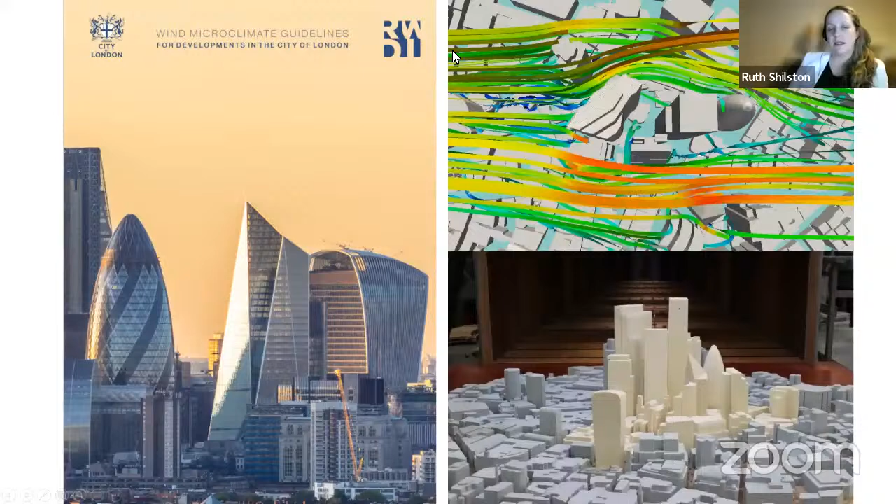And the two guidelines that are up on the screen here today are the two guidelines that govern how we undertake a daylight, sunlight and overshadowing or a wind assessment. So the City of London initially became interested in the quality of the public realm just from a wind point of view. So wind microclimate assessments have been undertaken on projects probably for the last 10 to 15 years.

And the City of London, which is in particular the financial district, the sort of modern downtown area of London, has had an explosion of tall towers in that time. And there were a number of towers which brought with them a reputation for being windy, for being uncomfortable. And the City of London came to realize that although they had a wind microclimate assessment undertaken on each of these schemes, that each scheme had used a different methodology, be that computational fluid dynamics modeling or physical wind tunnel testing.

They were using different versions of the assessment criteria, which in the UK is the Lawson comfort criteria, but there are many different versions out there. And simple things such as results were presented using different color scales. So that made it really challenging for the city officers to really understand those results. So they worked with RWDI leading up to 2019. We put in place with them the wind microclimate guidelines specifically for the City of London.

And these guidelines set out a minimum methodology for undertaking wind microclimate assessment. And it sets standards such as ensuring everyone's using the same climate data, same color scale, same assessment criteria, and sets up minimum standards for computational fluid dynamics modeling and physical testing. And for the UK, this is the first location that's had a set of guidelines that said how you should undertake a wind microclimate assessment. Everyone knows that one should be undertaken, but there were no guidelines for how one should be undertaken.

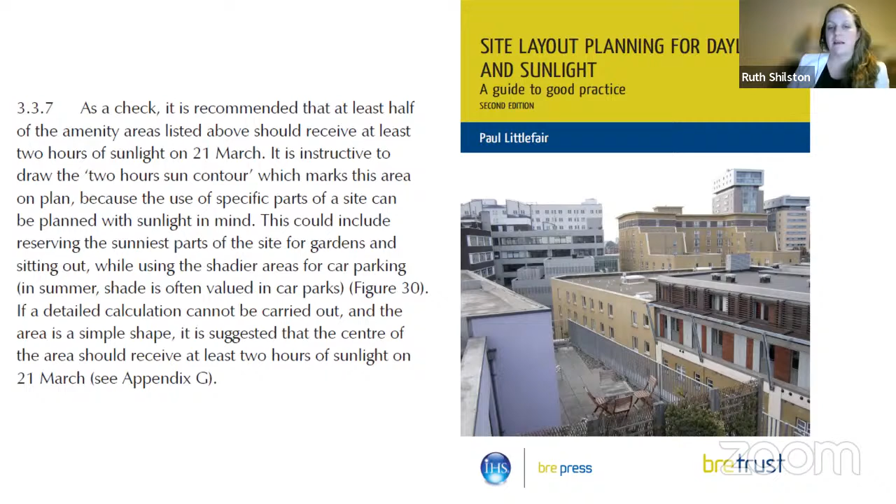So if we move on to the next slide, one of the fundamental components of the UK planning process is that each of these assessments is undertaken independently. So RWDI might be the wind consultant and the daylight sunlight overshadowing consultant, but historically the two assessments are undertaken completely separately with completely separate reports.

And it's actually very, very challenging for the planning officer to look at the wind results and the daylight sunlight overshadowing results and to combine the two together to actually have a consideration of whether a space truly is comfortable and whether a new development, a new tower, will adversely impact an existing space.

So for this reason, the City of London came back to RWDI and said, well, we'd like to have developed new guidelines that build on the wind guidelines that have been really successful, to create new guidelines that better measure how comfortable an external space actually is. And that's what brought us onto this topic of thermal comfort. So RWDI were the lead authors of these guidelines.

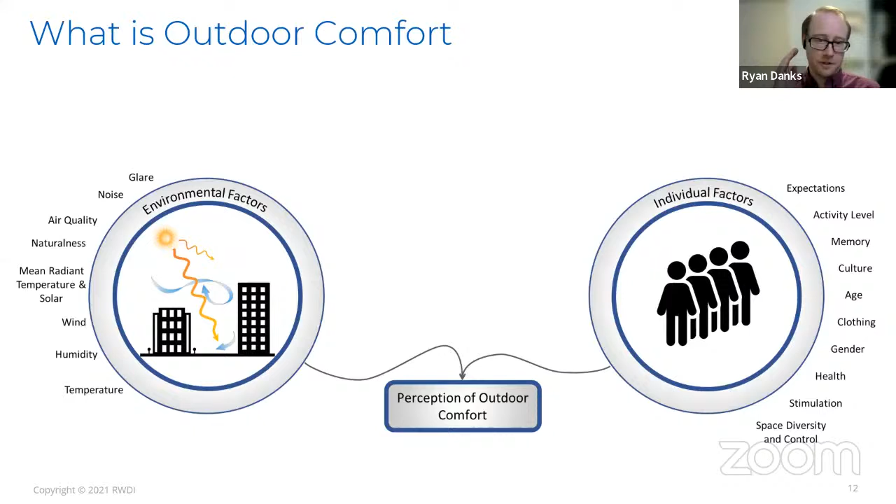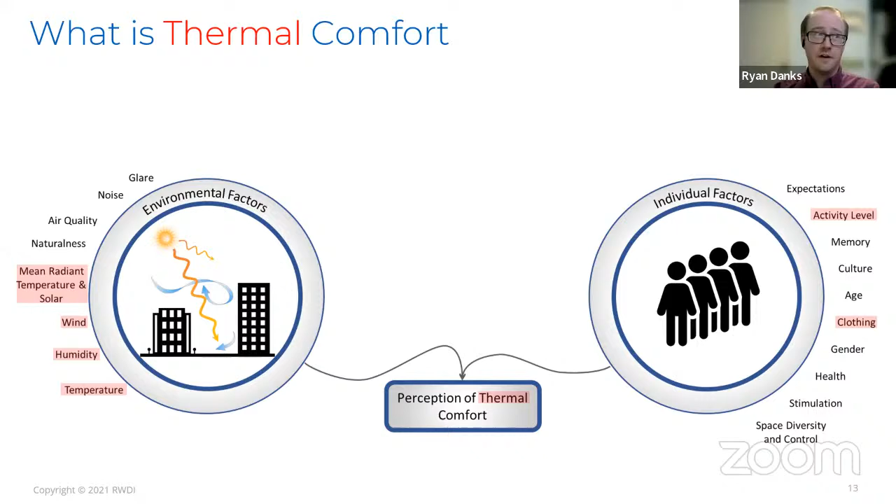And one of the big wins of these thermal comfort guidelines is taking a step toward that more holistic assessment of a building's impact. We're now looking at the combined effects of at least sun and wind. And thermal comfort was a good place to start because it's been studied for decades. We have no shortage of different ways to score an environment from a human thermal perspective. You know, at its simplest, we have metrics like humidex and wind chill.

Indoors, we have the PMV scale, which has the advantage of that very simple to understand scale where 0 is comfortable, and then as you move positive or negative, things get hotter or colder. The problem is we can't extend that outside. People have different expectations. The range of climate parameters are different. PMV just doesn't work outside. So more commonly, we're using equivalent temperature metrics like UTCI, SET, or PET.

And these can come with their own challenges too. UTCI includes some assumptions that can make it difficult to work with. And all three of those metrics, the equivalent temperature is actually an equivalent indoor temperature. And in our experience in consulting with these metrics, that can require a lot of coaching on our part to make our clients understand that.

A lot of people think it works similar to humidex or wind chill, where it's basically an outside temperature getting hotter, and that they would be able to measure this, UTCI of 35 degrees outside. And it can challenge their ability to understand what that really means. But as we'll see a little bit later with these guidelines for London, we were able to come to a workaround to try and make these results a little easier to understand for the general public.

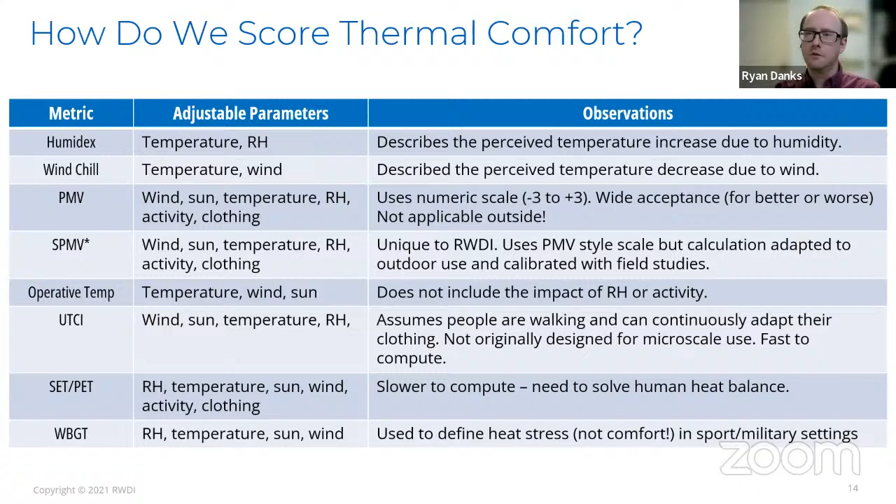And the question may be, why do we even bother doing this? Ruth mentioned a few reasons from sort of a branding big picture perspective, but there are financial considerations too. Cities spend a lot of money to maintain their public realm and their parks and trail systems. And so even if we add just a few weeks in spring and fall, even if we're just stretching the envelope of time that things are comfortable, that's a big win.

No one expects these guidelines to make things perfectly comfortable year round. But if we can add a few weeks where our parks are more usable, or businesses can take advantage of outdoor dining, that's a big win.

There is an environmental justice aspect to this as well. Not everyone can afford to drive in a climate controlled vehicle around the city or have their own little private garden to enjoy. People have to walk, people have to take the bus and wait for it. People need to use our public parks to get their daily dose of green space, which, as we all know, is so important. So by making sure our public realm is comfortable, that can actually mean a reasonably good quality of life improvement for many people in our cities.

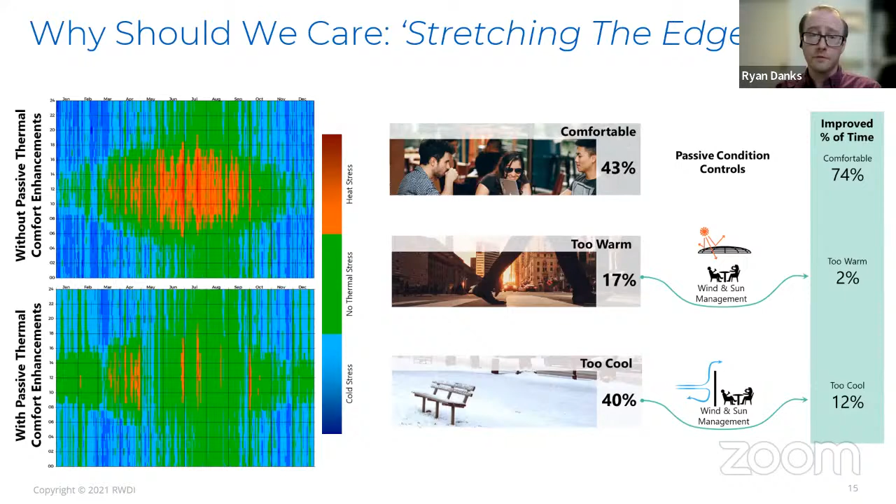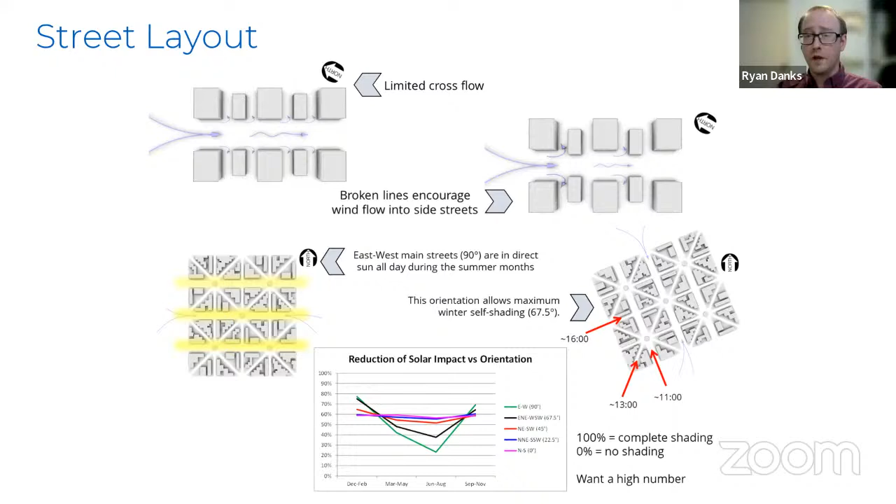So if we work our way up this pyramid, the biggest lever we have is the actual orientation and layout of our buildings and our streets. Now, in the context of a planning permission in London for a single building, this is not something we normally have much control over. Street layout is defined, the building footprint is fairly constrained. But if you're working on a larger master plan or a campus, it is important to know that through some thoughtful arrangement of your streets and your buildings, you can have a high degree of control over a large area, how much sun and wind they're exposed to, and therefore their thermal comfort. But in the context of the London guidelines, really manipulating the massing of the building is our most powerful tool in our toolkit.

The new kind of paradigm we need to be thinking about, though, is balancing these things together. Because we've always treated sun and wind as separate things, it's led to a lot of binary thinking where we always want to reduce winds and we always want to increase sun. And that isn't always going to be the case. Depending on where you are and what time of year you're talking about, a little bit of wind or a little bit of shade might actually be good. So it's this idea of balance and thinking in a more holistic, big picture way that we're really hoping to drive forward with these guidelines.

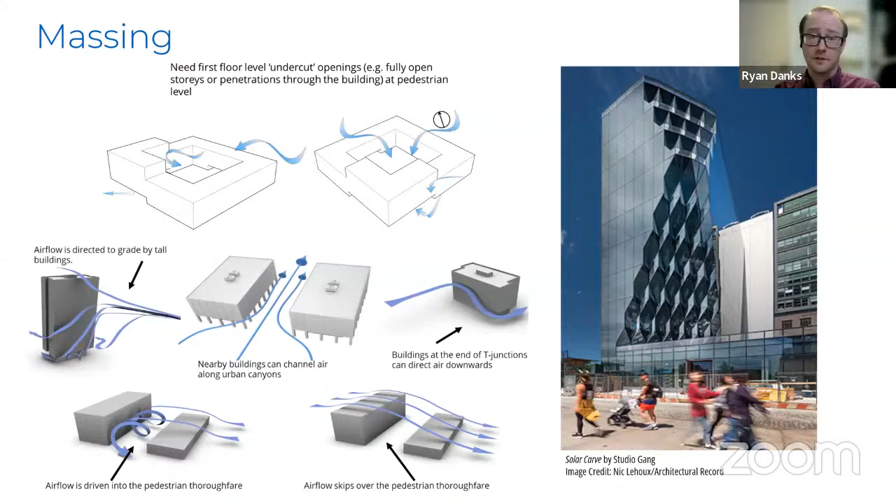If we move up another level, now we're looking at smaller scale interventions that you would add if massing was relatively fixed, or if you've done all you could from a massing standpoint.

Very similar to the previous discussion, trees, canopies, windscreens, we know how these things interact with wind and sun, but it's the idea of balance we need to remember too. If you're putting up a large windscreen, you don't necessarily want to make it opaque so that you can get winter sunlight to keep things warm.

At this scale, we're also now starting to get into measures that could potentially be operable. And that provides some very useful potential benefits. Windscreens can be rolled out as needed, opening up the space the rest of the time. You can use patio umbrellas to allow people a sense of control over their environment, which, there's been some research that has shown that this has a positive psychological effect on people, makes them more tolerant of their environment when they have a sense of control.

Even thoughtfully landscaping to provide a diversity of thermal comfort conditions can be really positive. It allows someone, again, that choice, that sense of control, to choose what sort of an environment they're sitting in. I can choose to sit someplace sunny or someplace windy.

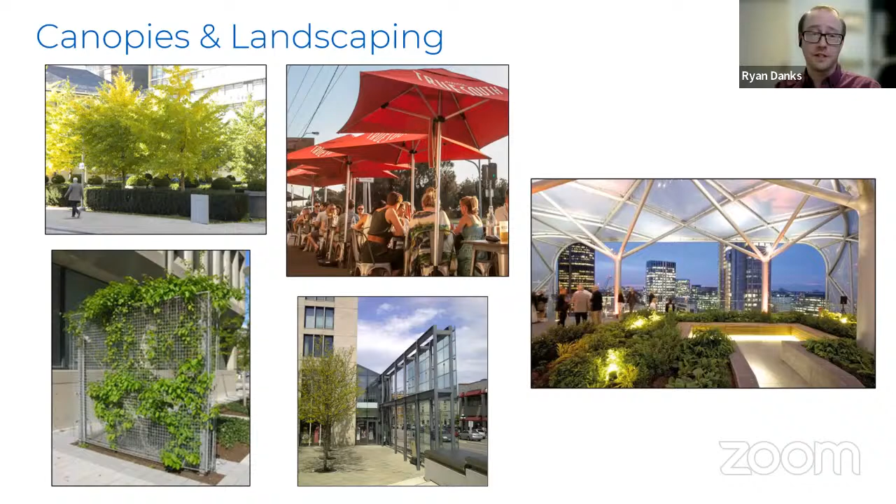And then at the top of the pyramid, we've got what we're calling active measures. These are thermal comfort enhancement strategies that require an outside source of energy. So these are misting systems, spill air, patio heaters. And these cannot be your primary approach to mitigating thermal comfort. In fact, in the context of the guidelines, these are explicitly disallowed. You have to do as much as you can passively first, and then the building owner can elect to use these measures as sort of a backup, or for cases where conditions are particularly extreme.

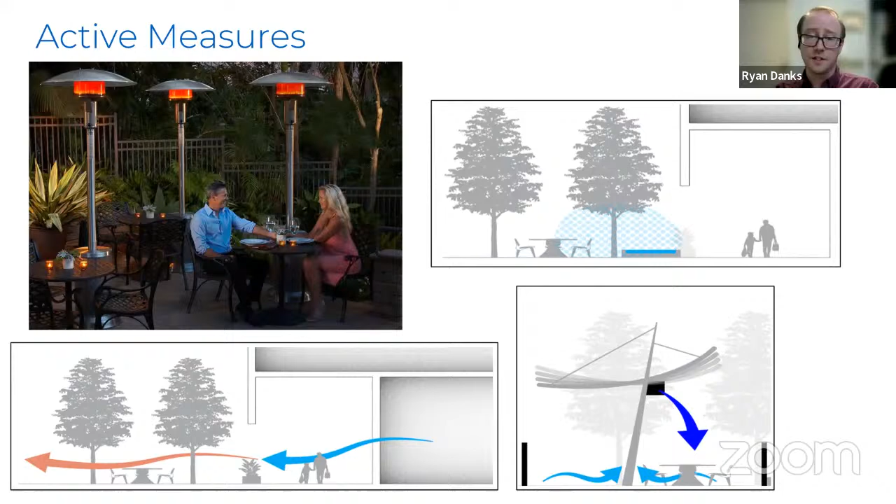But again, it's important, these can't just be plunked down anywhere. These also need thoughtful design. There's no point putting a misting system or a patio heater in an area that's going to be very windy. You're just going to completely dilute that impact, and it doesn't serve any purpose. So active measures can be useful. They cannot be your primary source of thermal comfort mitigation. And even if you are going to use them, they still need thoughtful design.

So having gone through all that, I'm now going to dive into a high level overview of the methodology itself. If you want all the gory details, there's the IBPSA paper that we wrote for last year's conference. But for the purposes of this webinar, I'm going to keep things fairly high level.

And kind of the most important thing to understand about these guidelines is that they are, at their core, a planning tool. We're not claiming that this is the most sophisticated or particularly novel approach to looking at thermal comfort. But what we needed was a tool that could create consistent and actionable measures for the planning department. So, no, we're not doing detailed representation of surface temperatures. We're not looking at transpiration from trees or plants. We're focusing on what the building mass can do to the public realm.

And that allows us to eliminate a whole lot of assumptions that would need to be made in order to conduct these studies, things that may not even be well known at the time of planning. And by removing those assumptions, we make things simpler for the people who are conducting these studies and the owners who have to pay for them, which means we don't disrupt the current workflow too badly, which was important.

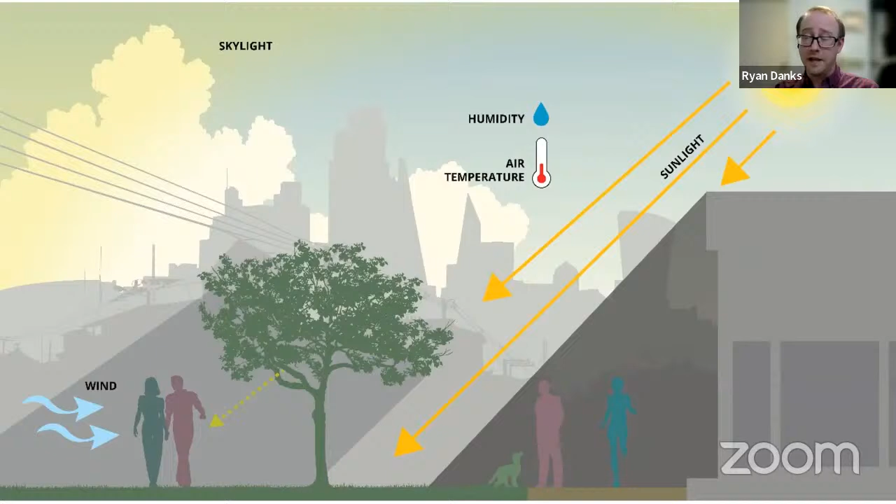But also, by removing the assumptions, we remove the opportunity for game playing. As soon as someone introduces guidelines or rules, there's going to be people out there who try to find loopholes. And the fewer avenues for that game playing, the better, because we want to make sure we're getting consistent results. Planners want to make sure they're always comparing different schemes using the same yardstick.

So that kind of boils down our thermal comfort equation to this. We combine MET data with simulations of wind and sun to get thermal comfort. On the climate data side, we needed to deviate a little bit from how things are commonly done in the UK, in that we actually have to use a time history of climate data rather than the more traditional Weibull statistics for wind. We need to know multiple parameters simultaneously, so we have to use a time history.

We also aren't necessarily able to use the typical year files. In the UK, they're called test reference years. And the reason for that is we want to look at things seasonally.

And there's often just not enough data once you've accounted for when certain spaces are likely to be used by season to have a good statistical understanding of when spaces will be comfortable. And that's never mind the fact that the weighting schemes for those typical year files don't really prioritize wind. So the wind data, especially as you get down to seasonal scales, can be kind of suspect.

And so what we're looking at here is a comparison of the data that we helped the city generate compared to a test reference year for London. And I should say that the data set for the city that we used was the most recent 5 years available from the EU's Copernicus atmospheric modeling system. So a data set taken right over the city from 2015 to 2019. And it did include things like the urban heat island aspects of the city, but not necessarily the smaller scale interactions of the city with the climate.

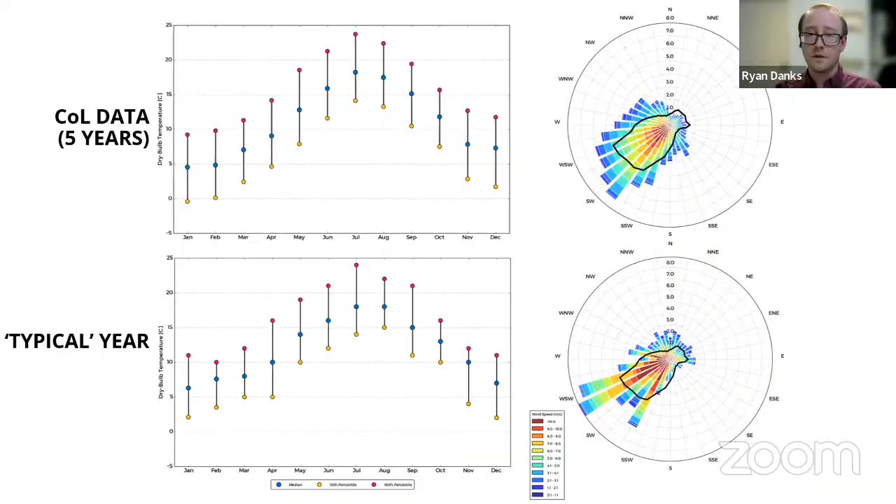As I mentioned, the advantage of this file is it's also able to take advantage of London's heat island effect, at least in a gross sense. And by taking the most recent 5 years, we've also captured several extreme cold and extreme heat conditions that happened in the city, which allows us to, to an extent, acknowledge climate change without needing to use prognostic techniques, which again introduce assumptions that we were looking to avoid.

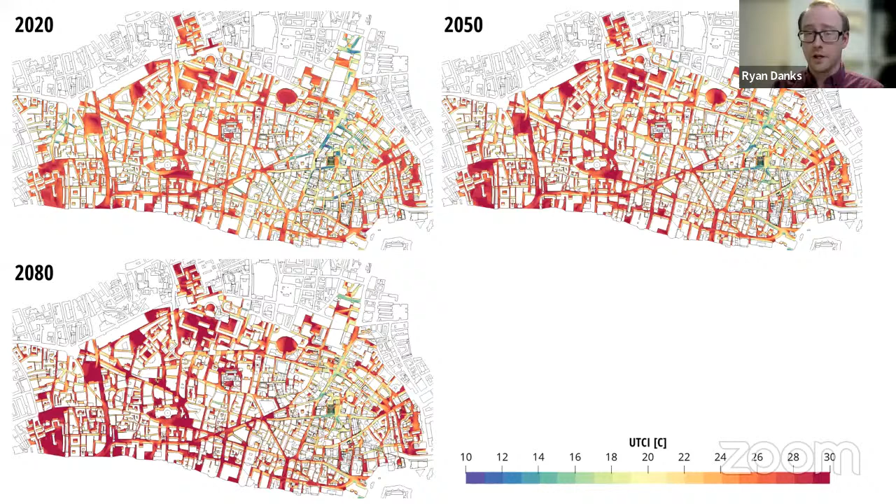So once we have our climate data, now we need to conduct our simulations. For wind, because the wind guidelines had been published just the year prior, we really didn't need to write very much in the guidelines about how the wind aspect of these studies should be conducted. This provided us with basically a fit for purpose approach for doing wind assessments. So if your simulations were compliant with the wind guidelines, they will be compliant for the thermal comfort guidelines. So this is a nice, efficient way to reuse that data in the planning process.

About the only variation was an explicit preference for CFD and computational approaches in the thermal comfort guidelines. And that was really just so we could get a better spatial resolution at the ground. That's not something you can really do with wind tunnel test points, and it is more important for thermal comfort since that can vary spatially much more quickly.

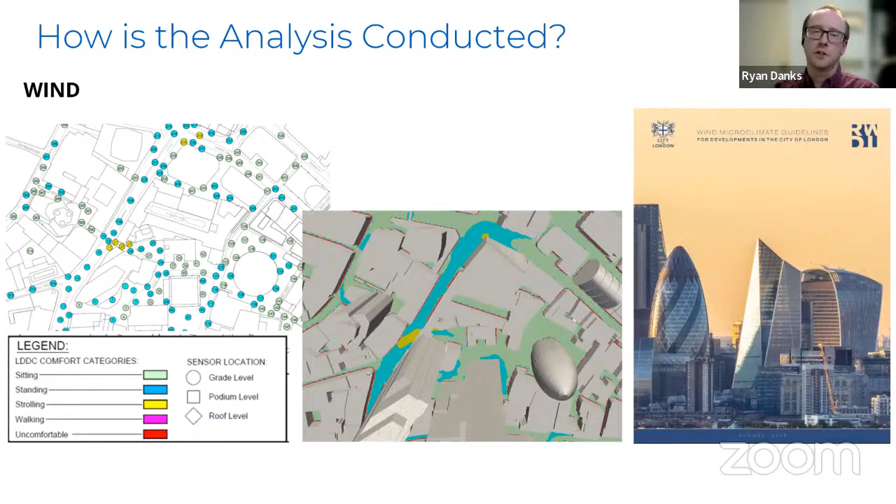On the solar side, however, we had to depart quite a bit from existing practice. Ruth alluded earlier that the current approach isn't necessarily very robust. And so we really needed to work a lot in bringing up the standard for conducting a solar study. So hour by hour simulations, proper view factors onto people for looking at the direct component, and using a more reasonable representation of the diffuse radiation coming from the sky.

In standard daylight requirements in the UK, you use the distribution here in the upper right. That's the CIE standard overcast sky. Very handy to use because you can compute daylight factors by hand if you need to with this.

But this distribution of energy is entirely fictitious. There's probably never been a sky with this distribution of radiation. And given London's cloudy climate, understanding that proper distribution of diffuse energy is actually pretty important. So the big requirement we had in the thermal comfort guidelines to try and remedy this was a requirement to use a more modern energy distribution that will vary hour by hour as you go through the MET record and distributes that energy in a more realistic sort of way.

The model we're showing here is the model from Perez. So we've got a central zone that's brighter because that's where the sun is, and then the brightening at the horizon because of reflections. And so this really was the biggest departure from existing practice, but hopefully it's one that we'll start seeing employed elsewhere because it really does a much better job at understanding those direct and diffuse solar heat components of the mean radiant temperature.

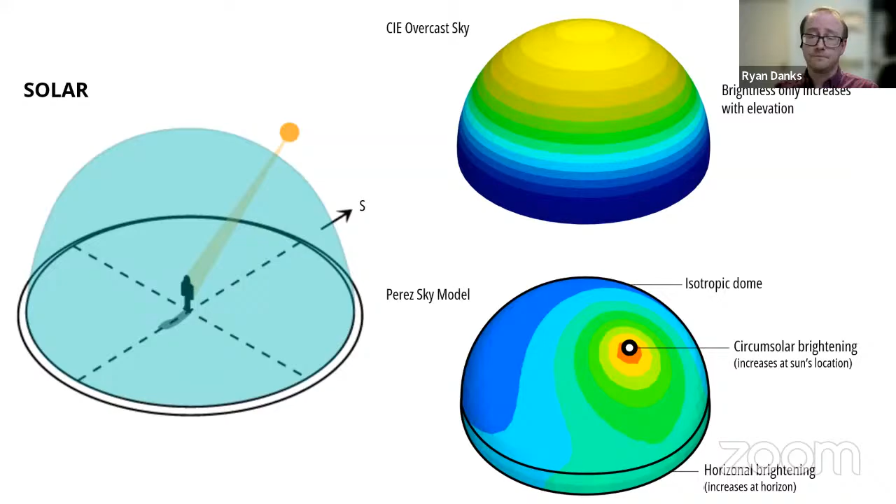And then lastly, I'll touch on our choice of metric. So there's no shortage of them, as I said. We settled on using UTCI. And there were a few reasons for that. The first was that this is a fairly recently developed metric. So there's lots and lots of available literature on its development. And a lot of those papers are freely available. So it is maybe a bit more transparent than some of the other metrics we could have chosen.

It's also available as sort of a high order polynomial function, which is computationally more efficient than some of the other metrics where you have to actually compute that human thermal heat balance hour by hour. And when we're talking about domains that are hundreds and hundreds of meters in radius, that speed up becomes very important.

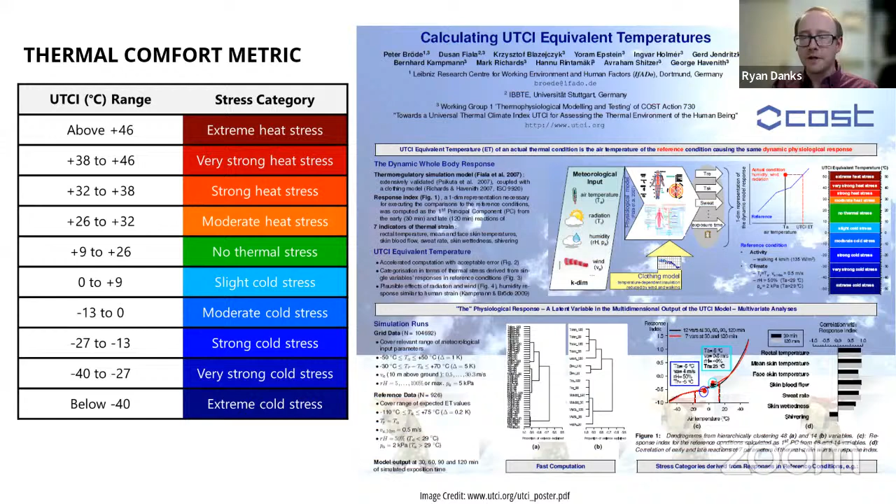It's also a nice metric because it takes people out of the equation. It makes assumptions about what they're doing and what they're wearing. And so again, that removes an avenue for game playing. We're only looking at the building now. You can't nudge up somebody's clothing level to make results look better.

Now, UTCI is not without its faults or challenges, particularly those assumptions about people. In this work, they're pretty reasonable, but you need to be careful because those clothing assumptions are highly Eurocentric. You'd never want to use UTCI in the Middle East, for example. The clothing levels just wouldn't work.

Another issue we ran into was sort of the categorization of these UTCI bands. If we had selected sort of the no thermal stress as our target range and run that through our met data, what we found was that half the time in the summer, it would be too hot, and 8 days out of 10 in the winter, it'd be too cold, which didn't match anybody's expectations or experience in the city, either within RWDI's UK office or at the city itself.

So what we did was start nudging up the range that we considered appropriate. This has been done in literature by others. And ultimately what we found was if we added a category on either side, suddenly our predictions of how often things would be comfortable started matching up with people's expectations and more sophisticated metrics like SET. Now, in a perfect world, this sort of a study would have been accompanied by survey data and that sort of thing. But unfortunately, the limitations of our project meant we couldn't do that. But hopefully in the future, that could be an avenue for future work.

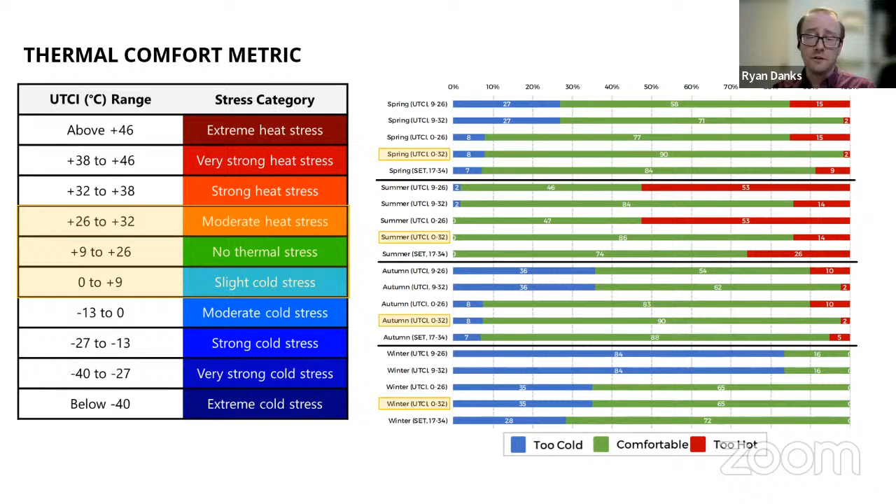And the reason we went to the trouble of trying to properly establish a band that could be considered acceptable is because that's a much easier way to deal with these results by just showing how often a space is in that acceptable band. We have now abstracted out our thermal comfort metric entirely and reframed this in something that's a lot easier for people to understand. We don't need to talk about temperatures anymore. We can just say, well, over here, it's comfortable 90% of the time, over here, it's comfortable 60% of the time. It also allows for easy comparisons because you can do a before and after and just subtract to see what the difference is.

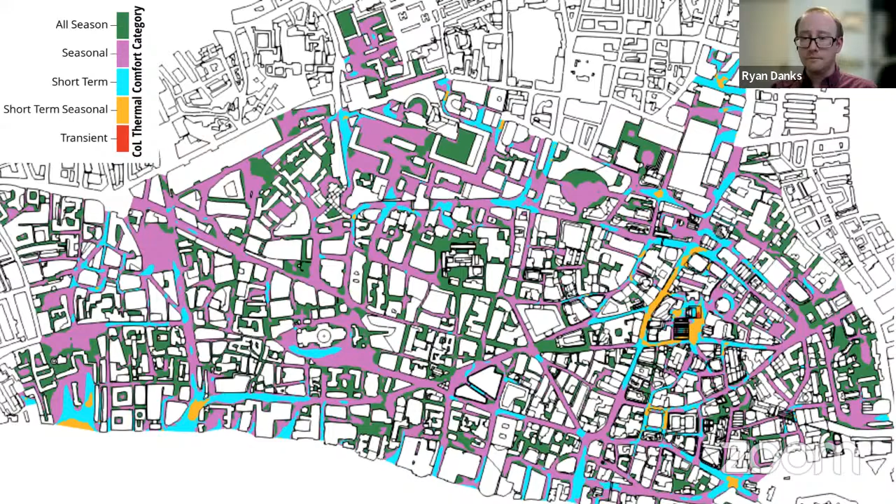Now, ultimately, the city planners wanted a sort of bottom line result that they could focus on. So what we ended up doing was creating a categorization based on those percentage of time things were comfortable by season. So it works very similarly to Lawson in that depending on how often a space is comfortable, we describe a kind of use that that space would be appropriate for. So the most comfortable spaces we called all season. So ideally, these would be places like parks.

Our seasonal spaces are where we've relaxed the requirement in winter. So, this would be something like an outdoor dining terrace where maybe people tend not to want to sit out there in the winter anyway. So it's not as important for it to be comfortable as frequently.

Short-term and short-term seasonal are spaces where people aren't expected to linger for long, or if they are, that doesn't happen very often. So this is unsheltered bus stops, entranceways, even office terraces where it's just for the office workers to be able to go out, get some fresh air for a little bit and go back inside.

And then our least comfortable or least often comfortable spaces we call transient. So we wouldn't want to see these in any places where a person would want to linger. But if they occur on roads or in back of house areas, that's probably not a big deal.

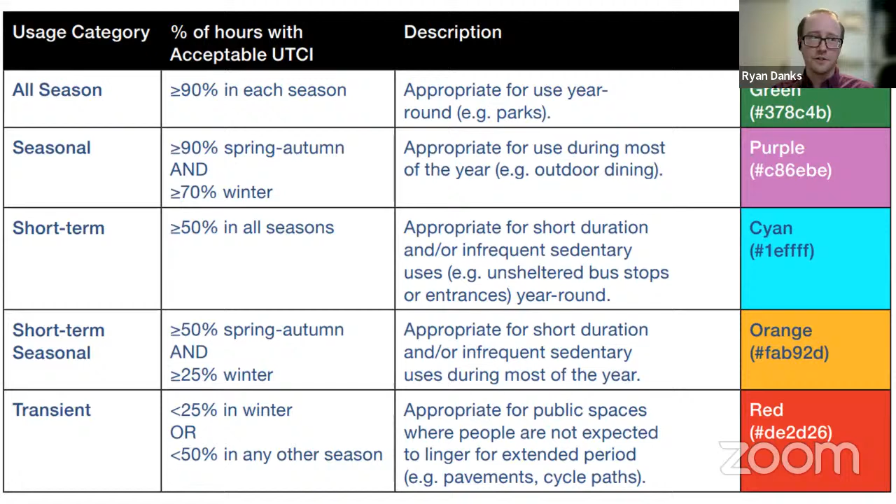And the nice thing is that we can combine these categories with a knowledge of what's going on to assess a building's impact. If a new building changes, let's say, an outdoor dining area from seasonal down to short-term seasonal or even transient, that's a major issue that we flag and that the building will now have to correct, because otherwise we've kind of ruined the utility of that space.

It also allows us to do nice trade-offs between existing and future spaces. Like everywhere else, London is building more roof and terrace level amenity space and replacing ground level amenity space. But that's not really a fair trade if it's not as comfortable. So with this approach, we can look at how comfortable the ground level space is now and how comfortable your above grade space will be to make sure that the new space is at least as good or ideally better than what you had before.

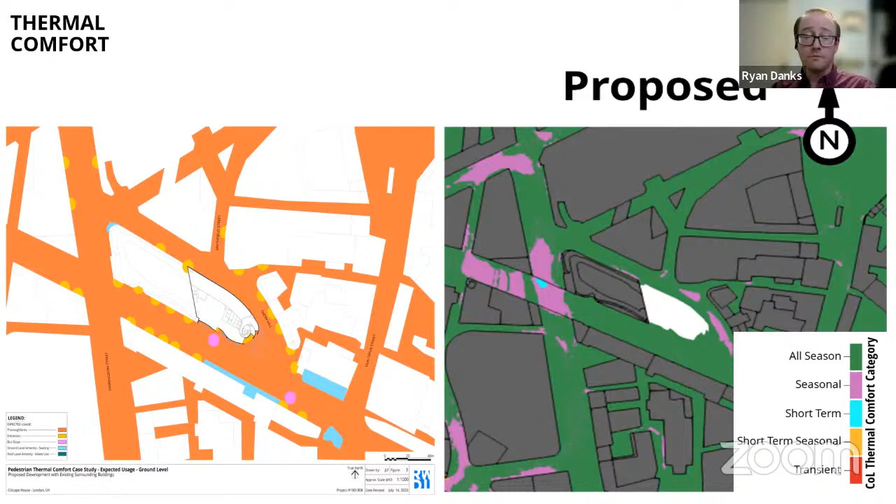And on that, I will hand things back to Ruth for some case studies. Thanks so much, Ryan. So these guidelines were launched in December of 2020, so they've been in force for about a year. Although, because the City of London knew they were coming forward and a number of the consultants who fed into the guidelines were active on projects, there were a number of projects that were sort of snuck in before the guidelines were officially launched.

And the Broadgate Estate is a historic sort of business district. It's owned by a firm called British Land, who are a major developer here in the UK. And they own not only this building, which sits right to the north of their estate, but about half a dozen other buildings that sit in this estate. And this is one of the last buildings they're refurbishing, and it's going to be a real flagship building for them.

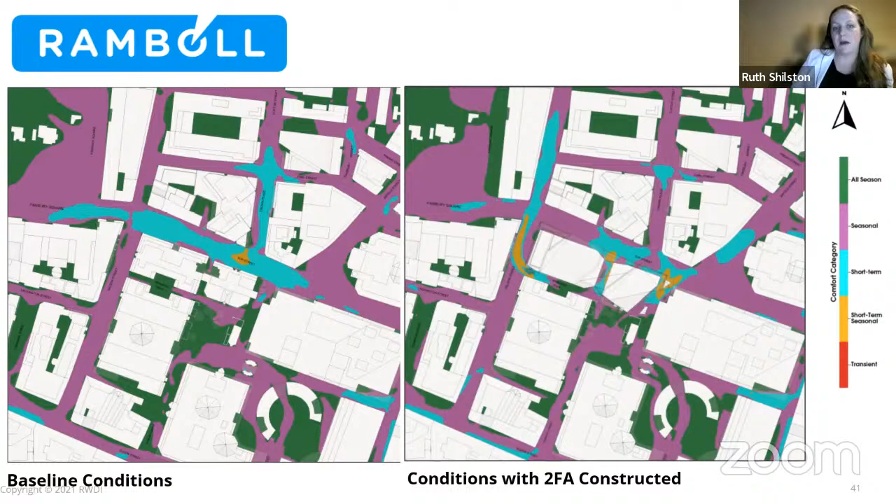Not only do I think the building is architecturally stunning and it was a pleasure to work on, but it has been a really nice legacy for us because it's shown how these guidelines can really inspire developers to make better use of their spaces.

The second project I wanted to use as a case study is called 100 Fetter Lane. This is a project that I worked on in 2021, so last year. And this building sits just shy of the 50-meter mark. So in terms of wind engineering, RWDI were the sole wind engineers on this project, and we used computational fluid dynamics for that wind modeling.

The developer in this case is someone called the Third London Wall. Fletcher Priest are the architects. Again, we have DP9 as planning consultant along with Waterman's, and HED are our landscape consultants on this project. And again, this is a commercial building, and I guess it should be noted that the majority of buildings within the City of London are commercial. So office with some food and beverage and similar at lower levels. There are a few residential schemes, but they're not frequent.

And the main feature for this scheme is that it has a series of terraces all the way up different heights of the building. And I think it's intended that this building will be let on a floor by floor basis. So you'd have a different business occupying each floor, and each business might then take one terrace that they'd have for use of their workers to get some fresh air at lunchtime or to sit out on.

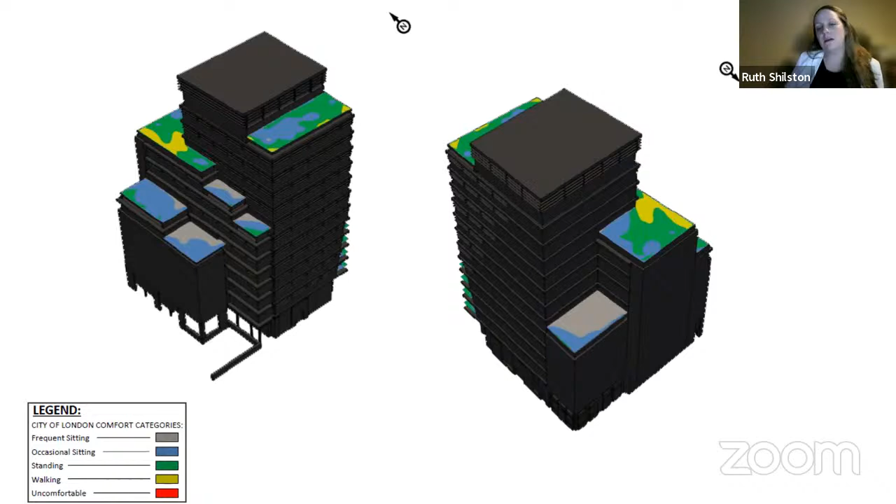Now, in permitting terms in the UK, because this is a commercial office building and these terraces are not accessible to the general public, it wouldn't necessarily mean that the scheme would be rejected, but it does feed into the overall viability of the scheme, and it is something that the City of London do take notice of, and they do want it to be considered, because having a developer build a building which promises great amenity, I mean, this building has a ton of external space that's not really actually usable. Again, it doesn't play into this world-class city.

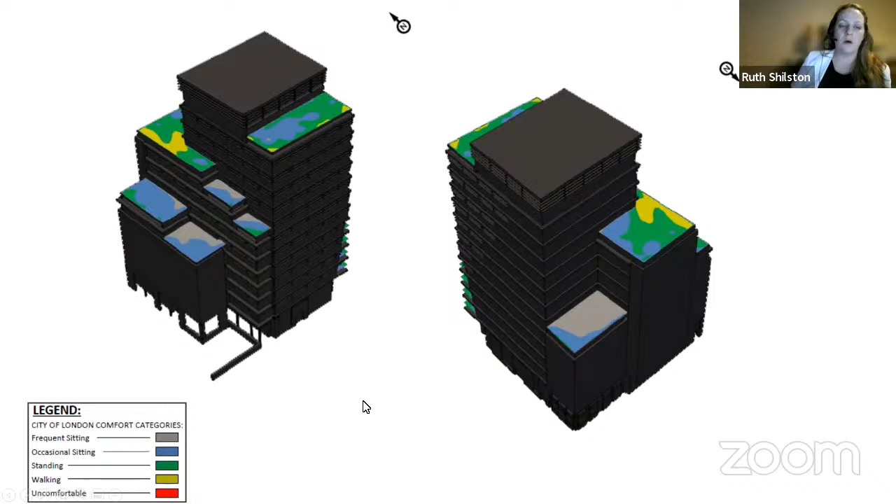So it's not an automatic fail like it would be if this was a viewing platform or a public space at ground level or a residential amenity where the stakes are much higher, but it is part of the conversation to be had with the city. So that's the pure wind results, and that's what up until the end of 2020 would have been the sole consideration for permitting.

So we were able to have a conversation with them that said, well, yes, you can imagine that people would go and stand out and walk through that narrow part of the terrace, but they'll still be able to sit out in the larger space that's afforded, because it is a very, very large terrace, so people can move around and use different spaces throughout the year. So the thermal comfort guidelines here really proved their worth, because they allowed us to have a conversation with the city that took into account the daylight, sunlight, overshadowing as well as the wind.

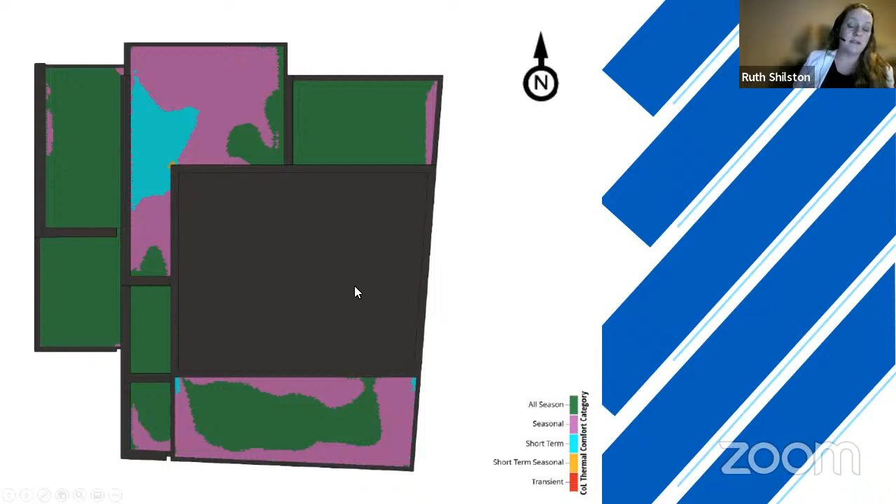The small terrace that sits to the northeast, which is all green, it's all season, actually failed in terms of its overshadowing. It doesn't get 2 hours of sunlight on the 21st of March for 50% of the area because it's north facing. So it is overshadowed by its own building, but it's also the calmest in terms of wind. So again, you get that trade-off.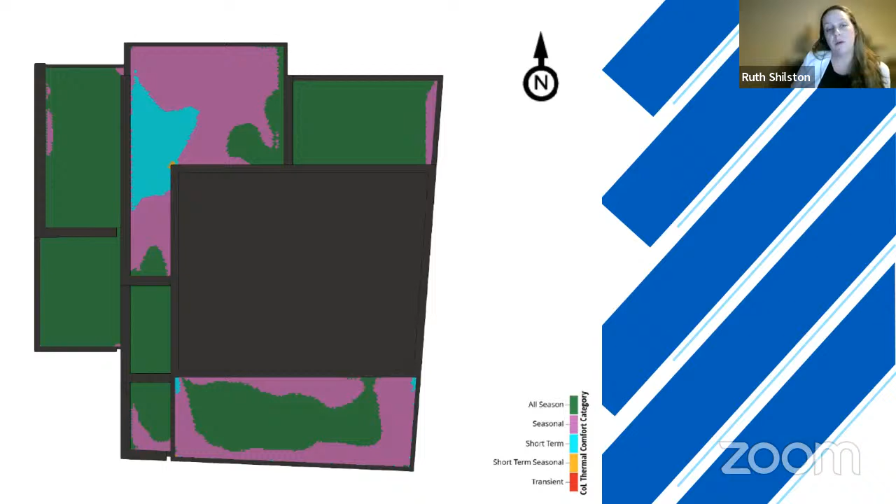It won't be as well daylit, which actually had more implications for the landscape consultant in this case, for what they could grow on that terrace. But it is very, very well sheltered in terms of wind. So it's going to be quite a different environment again, but probably quite a comfortable environment. It's not lacking in light. It just doesn't get that direct sunlight.

It's getting reflected sunlight. And the other thing that we're able to do, and Ryan showed some of these plots at a bigger scale, is really do a deep dive into what time of year we're seeing those issues. So within the reporting that we do for the City of London, and due to the fact we did a lot of training with their officers, they have a good understanding of what this means. We're able to say, well, if we look at it seasonally, what percentage of the hours have acceptable comfort?

So that's what we wanted to share with you today. We have about 10 minutes left, and we'd be very happy to take any questions.